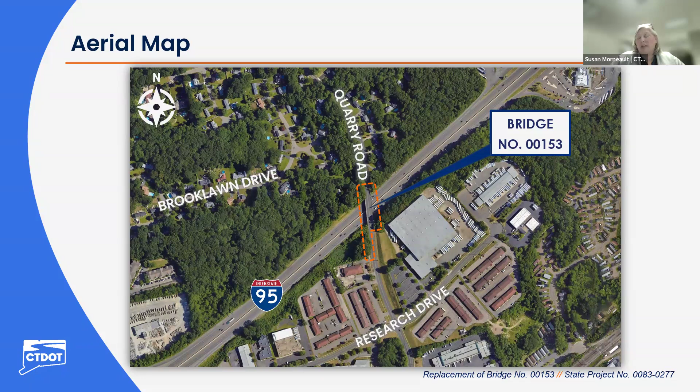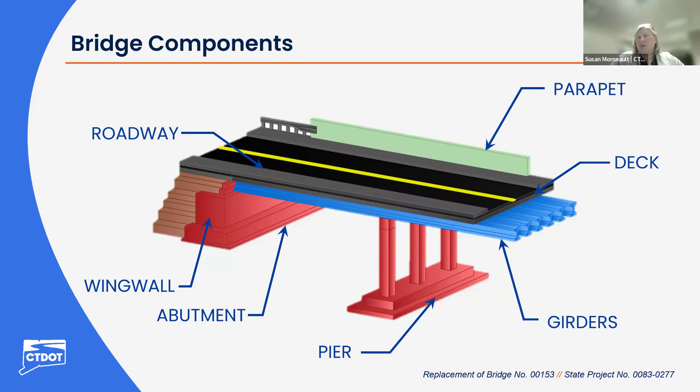At this time, I would like to hand the presentation over to Bill Murphy of BL Companies, who will give you an overview of the existing structure for bridge number 00153.

Thank you, and good evening. The existing bridge at Quarry Road conveys traffic across Interstate 95. It is a two-span multi-girder bridge structure supported on reinforced concrete abutments at the ends and a center pier in the middle. Constructed in 1958, it has a volume of traffic measured as 4,100 vehicles per day, the average daily traffic as measured by the Connecticut DOT's traffic log in year 2021.

As you would expect, the volume beneath the bridge on Interstate 95 is greater, measured more recently in 2023 as 126,000 vehicles per day. The photograph shown is a western view of the bridge, and you can see the abutments on the ends and the center pier in the middle.

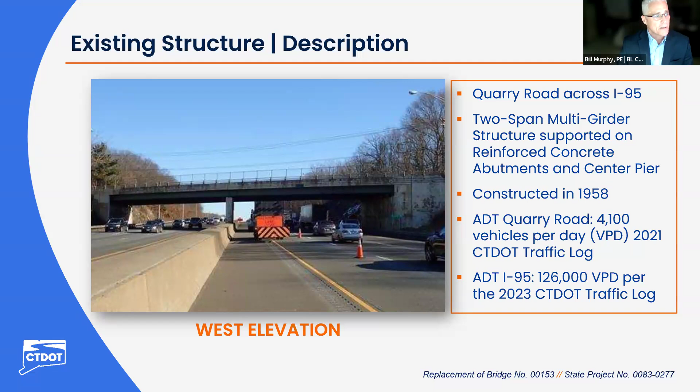The photograph on the left is as if you are standing on the edge of the bridge looking northward. You'll note there is an existing sidewalk on the eastern side of the bridge, as well as overhead utilities supported by a utility pole, again on the eastern side. The photograph on the right is an eastern view of the bridge, and therefore the traffic in the foreground is moving northward.

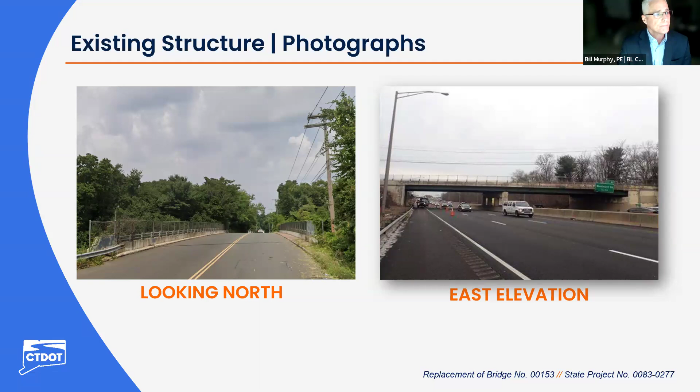The purpose of this project is to address the structural deficiencies of the existing bridge structure. The concrete has been experiencing spalling and cracking, and in some cases exposing reinforcing steel. The first photo on the left shows an example of this, with cracking and spalling of concrete visible.

The steel of the bridge has experienced rusting, both surface and pack rust. It's had some cracked welds, and there has been some impact damage, most recently in year 2022. The photograph in the middle shows some of the heavy rusting experienced on the bolted connections, and the photograph on the right shows what's known as section loss, essentially the rusting away of the steel, reducing the size of the structural members.

And with that, I'm going to turn it over to the design firm, McFarland Johnson, who will take you into what's proposed.

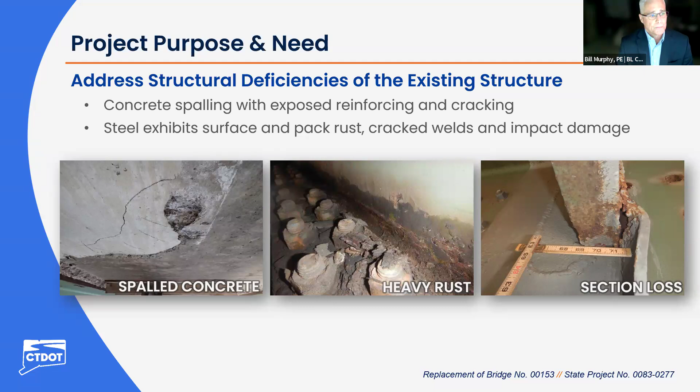Thanks, Bill. So we went through an alternatives evaluation to look at all sorts of different options for this structure. Looking in an aerial view here, what we're proposing to do is replace the structure pretty much with what you see out there now. We're going to be putting in a new 2-span structure.

Span lengths are going to be similar to what's out there now, approximately 83 feet. We're going to be replacing the pier that's in the median of Interstate 95. We're going to be raising the profile of the bridge, which I'll talk about a little bit on the next slide. We're going to have to do some approach roadway work that's shown in green right here. We're also going to be moving the sidewalk over to the west side of the bridge.

We're going to be tying the sidewalk into the existing sidewalk that's on the south side of the bridge right now. One of the things we did do in alternatives evaluation was to make sure that any roadway reconstruction work that does have to be performed, we're not going to be impacting access to driveways and businesses that are on either side of the bridge. That's one of the goals of the project, and we're trying to minimize the impacts to the greatest extent possible.

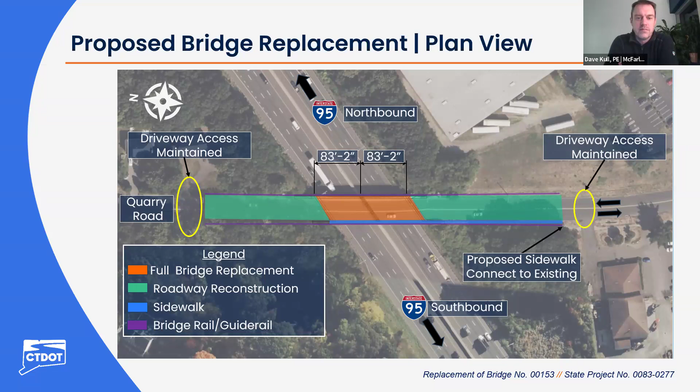Here's an elevation view of the bridge. It's going to look pretty similar to what you see when you drive on Interstate 95 right now. The big difference is that we're increasing the vertical clearance on the structure. Right now, we provide about 14 feet of vertical clearance. We're going to be increasing that to a minimum of 16 feet 3 inches. That meets all current design criteria, and it's going to greatly reduce the possibility of there ever being impact damage to this bridge. So it's going to provide for a much safer structure.

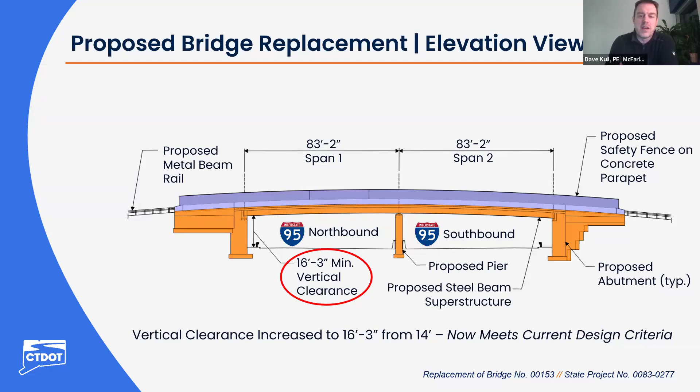Section view of the structure for what we're proposing right now: 12-foot travel lanes with 8-foot shoulders. That meets current design criteria. We are providing a 5-foot 6-inch sidewalk on the west side of the bridge. Safety rail with a safety fence will be on either side of the structure.

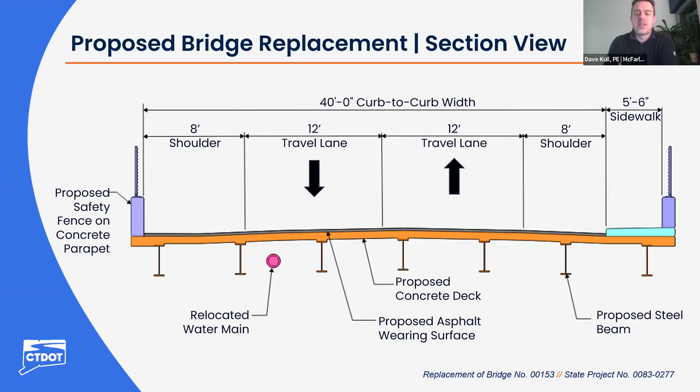There are utilities that are carried by this bridge. We are going to be making accommodation for those, and we'll be carrying those utilities on the new structure as well. There will be a nice smooth asphalt riding surface that we're putting on this structure, and that's going to tie into the roadway work that's being performed. I'm going to turn it over now to Gene McCarthy, who's going to talk about some of the highway design and traffic control maintenance that's going to be performed.

Finally, as Dave said earlier about the driveways, we will maintain access to all residential and commercial driveways during the duration of the construction.

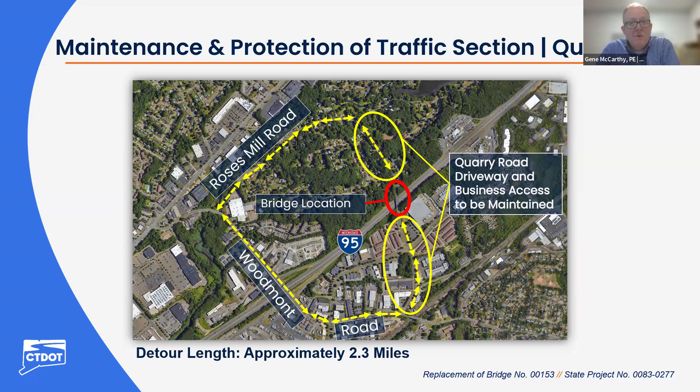There will also be construction that will be very visible from I-95. As stated, when the abutments are reconstructed, we will have to secure work zones to allow for the demolition and the construction of the new abutments. During all peak periods of traffic, all 3 lanes in each direction of I-95 will be maintained, and the construction will occur on the outside.

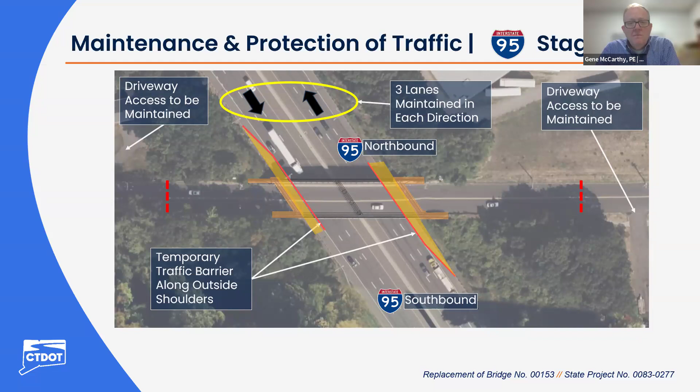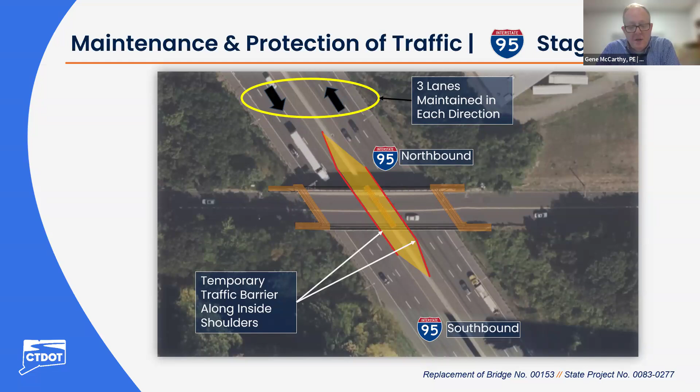Couple of other elements of the project. As stated, there are some utilities in the area. The water main will be replaced and carried on the bridge. There are systems for I-95, the intelligent transportation systems. Some of those conduits are carried on the bridge and around the structure. Those will all be replaced and maintained during the project. As Bill had stated, there are some aerial utilities, and we will do our best to minimize impacts, but they will be maintained by the project.

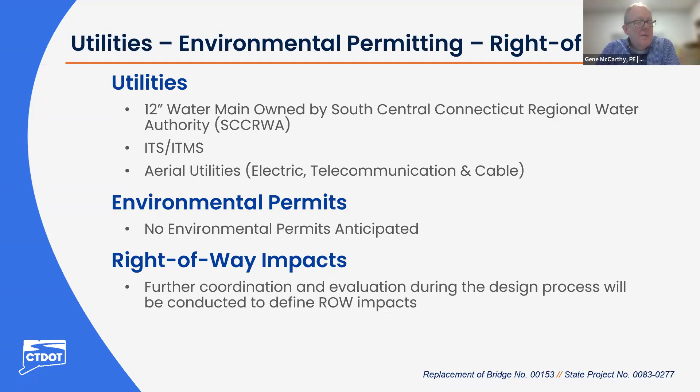Currently, we are not anticipating the need for environmental permits. We will continue to monitor that as we progress the design. Similarly with the right-of-way, as we move forward with design we will keep an eye on the impacts. At this point, we do not anticipate impacting private parcels, but we'll learn more as we progress the design.

And I will now turn it over back to Susan Morneau.

Please note, the Department of Transportation is looking for ways to expedite this project, and we may be able to pull the project schedule in.